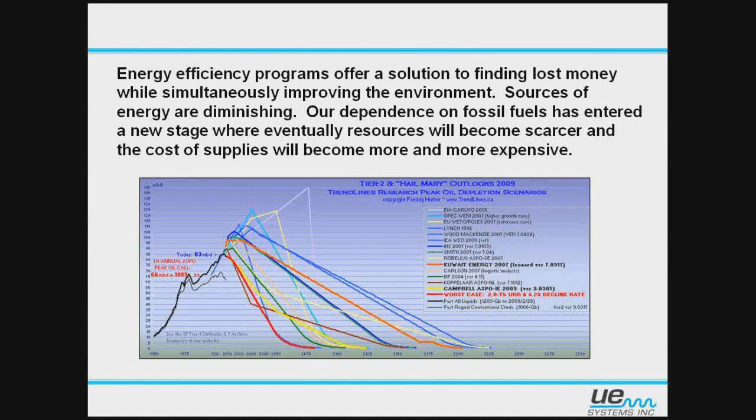Fossil fuels are depleting, and we are trying to find new energy efficiency. And because of our dependence on fossil fuels and the lack of them, prices are higher as they are becoming harder to find. I think we all realize that. And really going back to the pump, it's really affecting us all. To reduce the impact of fossil fuels, companies are aggressively finding and implementing new programs to reduce the usage of energy. Some of the programs require a lot of money to initiate. It may take years to complete them.

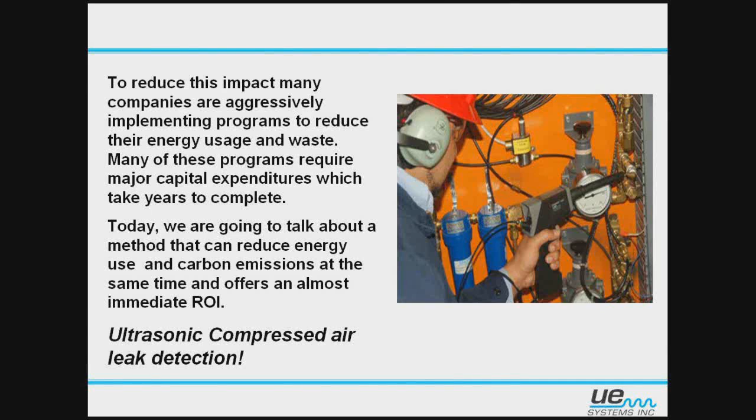But today, we are going to talk about ultrasonic compressed air leak detection. And with that, we're going to talk about the method that can reduce energy use and carbon emissions at the same time and offer an almost immediate return on investment. And again, that's going to be leak detection. So let's get going on that.

But let's say we even double that usable energy to 36% efficiency. Is that a good standard? I don't really think it is. So really, what we're doing is we have an inefficient machine feeding leaks, making it more inefficient. So we want to get the very most efficiency out of that machine that we can because it's already inefficient.

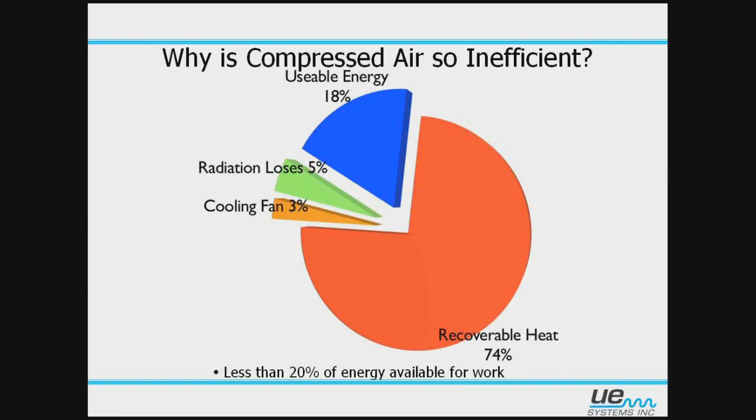And just to give you an idea, I looked up some stuff here. On average, it takes 8 horsepower of electricity to make 1 horsepower of compressed air. That's not a very good ratio. 1 horsepower of electricity on average is about 746 watts, or you can think of it as 1 horsepower of electricity will produce about 4 CFM. So a lot of electricity just to make that compressed air, right? So we really want to make that as efficient as we can.

Now, how do ultrasonic instruments work? I told you we're going to be able to detect the compressed air leaks. And let's talk about that for a second. I'll read that and then we'll talk about it. Ultrasonic instruments detect the high-frequency turbulence created by any compressed air or gas leak. It is not gas-dependent. What's happening is this.

Imagine a pipe with compressed gas in it, whether it's air or gas, it doesn't matter. And imagine that pipe springs a leak. And so you have that compressed gas escaping out into atmosphere, which will be a lower pressure. What happens at that leak source? That compressed gas wants to expand out to the lower pressure outside. As it's doing that, it forms little vortexes and eddies, or think of them as tornadoes. And right in that area, that leak site, is what we call turbulence, or turbulent air.

Turbulence emits ultrasonic sound waves. Ultrasonic sound waves are very directional, which allows us to find them very easily with the instruments. All right? So with the high-frequency sound waves, we hear them easily.

You may be thinking, how can I hear this in a noisy environment? Number one, we must think: just because it's noisy to our ears in our audible range does not mean that it's going to be noisy to our ultrasonic unit. Remember, we're going to focus in on a certain frequency. For air leaks, it's 40 kilohertz. And at 40 kilohertz, it may not be very noisy or as noisy as you thought it was.

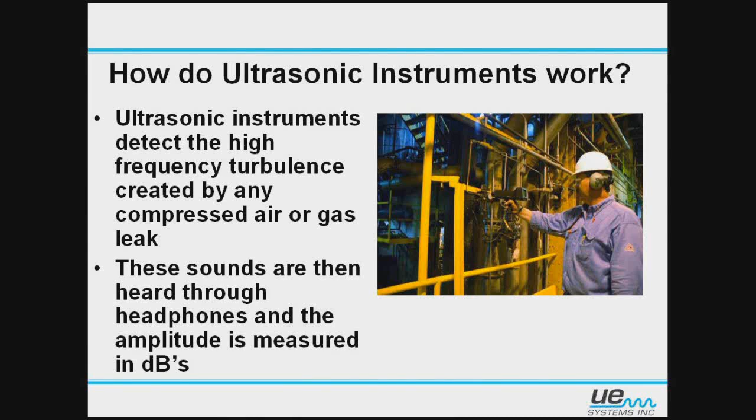But let's say that it is very noisy in the ultrasonic area. Remember, the sound is very directional, so that signal is very directional. So we can key in on one sound and follow it to the very source of it. All right? These sounds are then heard through the headphones, and the amplitude is measured in decibels, and we abbreviate that dBs.

So what I want to talk about right now is how do we locate that leak? I'm going to go through this fairly quickly, but just to give you an idea, let's look at that picture on the top left-hand corner, the #1 picture there, and that's called gross to fine. The gross to fine method is how we find air leaks. What that means basically is we're going to start out with a big area, and we're going to narrow it down till we pinpoint that leak at the very end.

So at the very beginning, we see that gentleman starting at a distance from the area that he is scanning, and he has his sensitivity turned all the way up. Think of sensitivity as how much power you are giving that unit to listen to that sound. So if we turn the sensitivity all the way up, we're hearing all kinds of stuff. Right now, he's probably hearing everything, so he can't hear it all that well, so he'll adjust the sensitivity down until he finds a directional sound wave.

Once he finds that sound wave, he's going to adjust it down to just where he can hear it. It doesn't need to be loud. Loud is not always good. He keys in on it, and he's going to start walking toward that sound. He should have adjusted it down to the point that he hears it when he's focused straight on, and when he flicks his wrist to the left or to the right, he barely hears it in either direction, or doesn't hear it at all. But when he comes back to the center, he should hear it nice and clear. And then he'll start walking toward it.

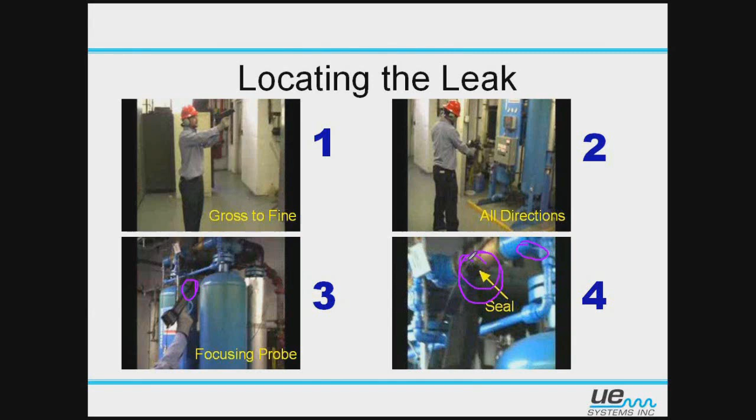If he still hears it and it's nice and crisp and loud, he knows he has that leak. If, say, he's sealing up over here somewhere where the leak is not present, he will not hear that leak. But here, he'll hear that leak nice and loud and clear. So sealing up on the leak site is the way we confirm that there is a leak there. Okay, so I know that was quick. We will continue on here to the next slide.

All right, once he's sealed up on that rubber boot or on that leak site with the rubber, he's going to store the decibel. But before he stores the decibel, once he's up here in this area, he's going to back off 12 to 15 inches from where he's sealed up and where he located that leak and where he confirmed where it was. He's going to back up 12 to 15 inches, or 30 to 38 centimeters there, and then he will store the reading. So remember, confirm where the leak is, then from that leak site, back off 12 to 15 inches directly, and then store the information.

And once we store it, it's going to store the information as a decibel right there. Excuse my drawing. But we're going to measure the leak in dBs, or decibels. That decibel is going to give us a whole lot of information. Also note that he is at 40 kilohertz. All right, and that is the place to be for air leaks.

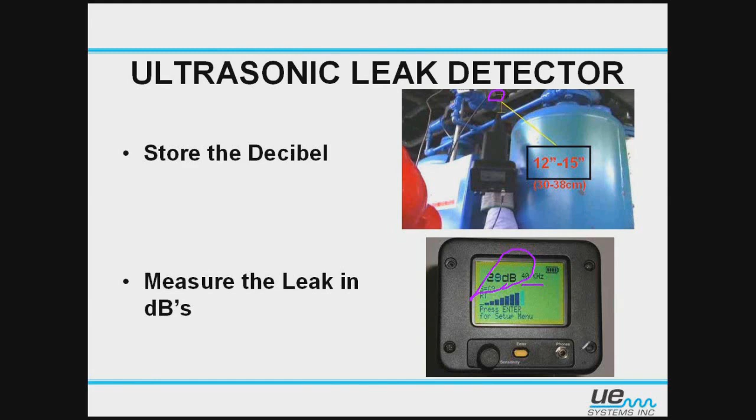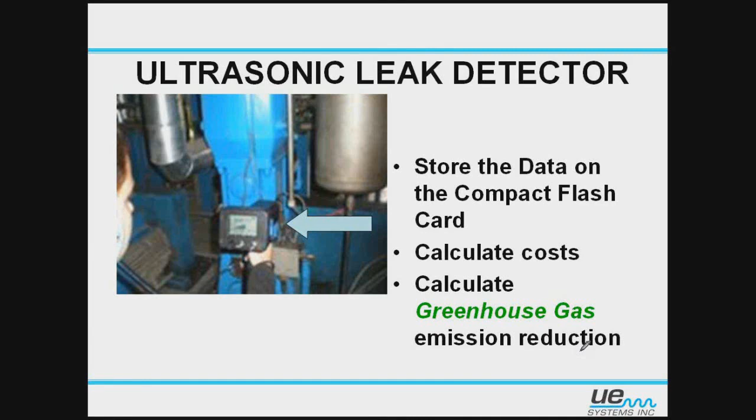Now when you store the information, you're either going to store it, if you're using the 10,000, on a compact flash card, or if you're using the UltraProbe 3000 or 9000, on the onboard memory. And then you're going to connect up to the computer and download the information, whether it's on the flash card and you have a flash card reader, or you connect directly to the gun with the 3 or the 9000. And once we do that, we're going to be able to calculate cost, calculate greenhouse gas emissions, and how we're avoiding that as well. Okay? And so the software is going to give us a whole lot of information.

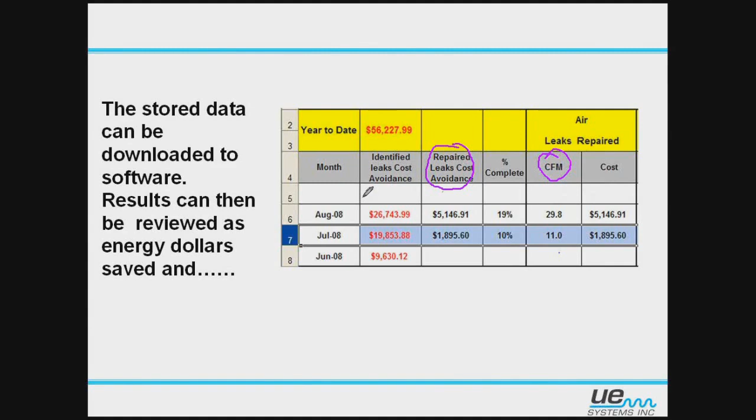If we move over here to the repaired leak cost avoidance, once we repair it and document that, it's telling us how much we've avoided in an electrical cost. It also gives us a percentage of what we've completed as well. Also, it gives us our CFM. What are we leaking in CFM, cubic feet per minute, and it'll give us a tally of overall as well. But we can convert that CFM into kilowatt hours, and once we do that, we can get a cost, and we have our cost here. So it's doing it automatically for you by you just putting the decibel and the correct pressure in there that you were scanning for. So we will move forward.

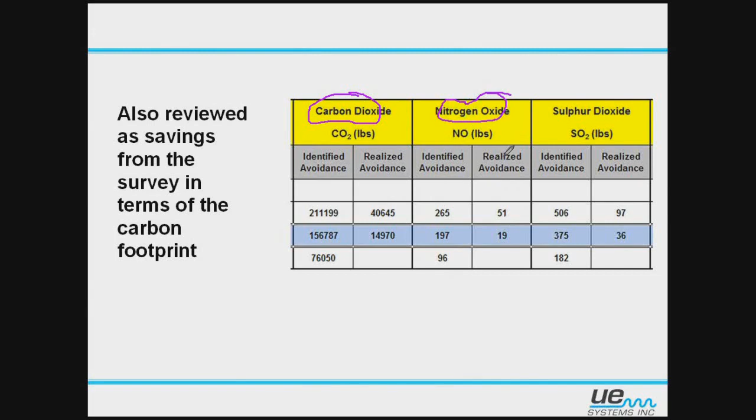The big thing that the software also does for you, as we've been talking about the carbon footprint or the carbon dioxide avoidance, is this allows us to see what we're avoiding in that carbon footprint by not using that electricity that we were using. It shows us carbon dioxide in pounds here, the identified and the realized, meaning the completed repairs, what we've avoided, the nitrogen oxide here, the identified, and then the completed as well, and then sulfur dioxide.

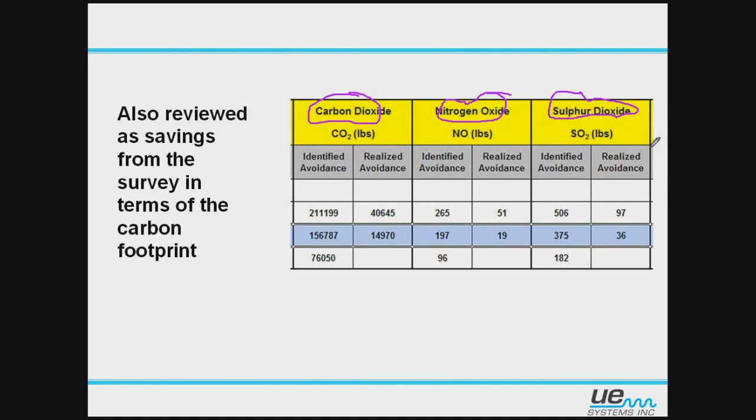So it's given us an idea of what we're actually avoiding. It's giving us a number, a figure, which really helps other than just plugging the leak, which of course is the most important part. We're going to correct these leaks once we have identified them, but it's letting us know, hey, here's what we were leaking, here's what it was costing us, here's what we were putting out into the atmosphere, now look at what we're not putting out into the atmosphere, look at the money we're saving.

Okay? So now, let's see how we convert all the data collected from the compressed air survey into usable, reportable data. So what we're going to do is back out of the PowerPoint presentation right now, and we're going to look at the software itself. So we'll start with UltraTrend DMS.

So I'll give that time. I know it takes a little bit of time for y'all to catch up from my screen, so I'll make sure that it's up there. Hopefully everybody is seeing UltraTrend DMS version 3. And now I have a plant opened. Well, I don't have it opened. I have it highlighted there.

And that Maple Street plant comes in every version of DMS that we give to you as an example plant. So you can follow along with yours. You can go back and do what I just did to the T, because this is the same plant that you should have in your software. So Maple Street's the name of the plant. And of course, for DMS, I'm not going to go through all of DMS right now. We have webinars previously done that will walk you through, just like I'm doing, through the DMS, how to upload, how to download, and everything else.

Do remember, though, when we are uploading and downloading to DMS, it's very important to go to Communications and know what you're doing. Remember, send group to flashcard, download from flashcard is for the 10,000 only. Upload group and download group is for the 3000 and the 9000. More than likely, for the 3 or the 9000, you'll probably have to configure that port because you are on a cable. And once you configure it, you test it, and it's either going to say unsuccessful or successful. If you're successful, go on with your upload and download.

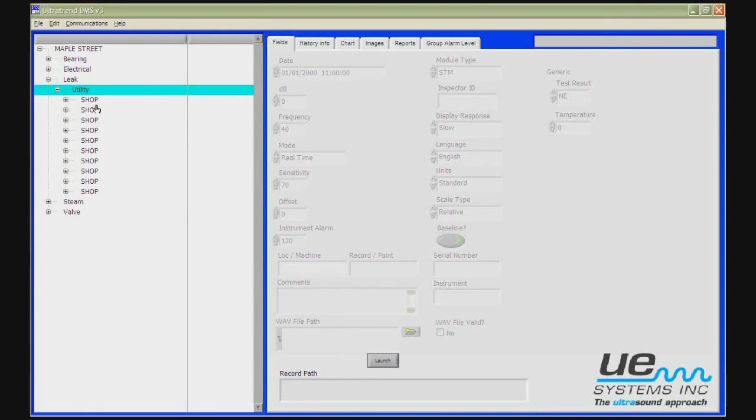So the way this one was particularly done was they built it down to utility. They're going to go survey the shop. Once they surveyed it, they added all this in when they downloaded the information. This was blank, but when they came back and downloaded it, it populated it for them. So the shop area, they used tags for each one of these that they located. Each one of these numbers is an identified leak.

The tag number for this first one here is 12334. Notice it has a 001 after it, and if you go below that, notice it has a 002 after it, and then so on and so forth all the way down. The computer will automatically generate these numbers here, the 001, the 002, and 003. Don't be concerned with those. Those are your point numbers, or your location where you exactly found that leak.

The way you're going to keep up with it is either by description or by the tag number, a 2- or 3-part tag that you can get from us or wherever. But you want to tag it. How is anyone going to come behind you and literally know where that leak was to repair it? 12334 was that tag number.

And let's open up that tag, or that find, and we keep up with the readings by time and date. So we have 7/9/2008 was when it was found at 2:02 p.m. Notice when I highlighted that reading there, it activated the field view over here.

Okay, so let's walk through real quick and talk about this. Number one, we have the time and the date here, done in military time, and the date is month, day, year. The most important thing we're collecting while we're out there is the decibel. Now we need the time and date too to make a good report, and we want to see the frequency to know we were at 40 kilohertz, and that's reporting all that information back to me.

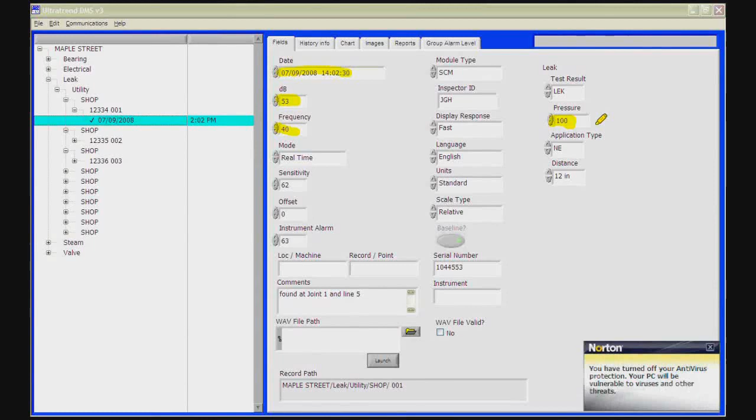The other thing that is so important to make sure you gather information on is, of course, where was the leak, but what was the pressure? Do you know what the pressure was at that point? Are you running on a 100 psi system, but you're all the way across the plant? Do you think it's really 100 psi, or should you estimate it down maybe a little lower to 75 psi? Is there some kind of gauge on the other end where you actually know what that pressure is? So don't assume, just because the compressor says it's putting out 100 psi, by the other end of it, it's probably not getting 100 psi. So you might want to check that any way you can.

But again, these are the big important things, dB and pressure. Those two things are going to give me a CFM, and we need that CFM dramatically. And then again, we double check our frequency for 40 kilohertz, and of course it'll populate the date for us.

The rest of it, we don't really need that information other than maybe down here at comments. Comments, we could type in here - notice I wrote in found at joint 1 and line 5. This will export this information as well. Okay, so with that, let's look at the next one.

Let me go back over here and change out that highlighter just so you get the idea. If we look at this one, we'll open up that reading, and we see 40 decibels here at 150 psi. Do you see that? So all the information can be changed in here. You could change that to 100 psi if it was 100 psi or whatever the pressure was, or just leave it where it defaults and then export it, and then change it in the compressed air software.

So let's say we're done here. Let's say we've downloaded this information. We've come in here to check, and we've made sure every one of these has the correct readings for us, the decibel. Maybe we've added some comments as a description of where the leak is located, and we made sure where the pressure is.

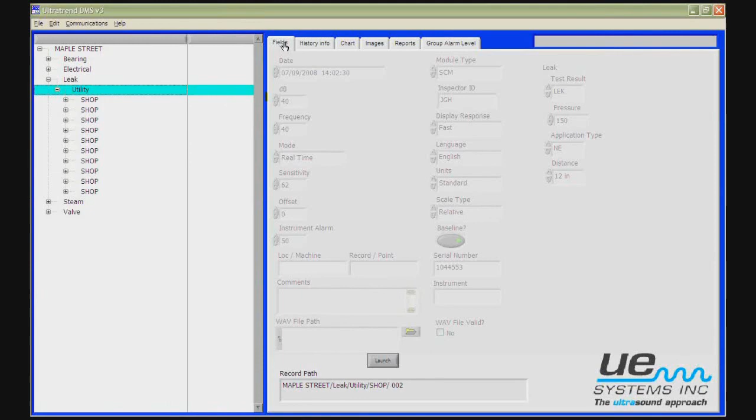But let's go through here, and I'll show you what we've done different and made a little easier. So I've highlighted - notice you've got to highlight the name of that group, the name of that route. We call it a group to be able to export. Once I do that, notice there are tabs here at the top. We were in the Field tab. We're going to skip the history info, the chart, and the images, and go straight to the Report tab. So I'm going to click on the Reports tab. Once I'm in the Reports tab, I have two options: View Group in Excel on the bottom, Launch Export Wizard on the top. Forget the View Group in Excel. Remember Launch Export Wizard, because it's going to walk us through exactly what we want to do.

So I'm going to launch that now. So here it just tells us what it's getting ready to do. You can read through that when you do it. Just go ahead and hit Next, and it's going to give me my options. We have 4 options in here for you. We have Simple Mode, we have Advanced Mode, we have Quick Mode, and those are for exporting stuff like a bearing group or route and stuff like that.

What we want to do is the compressed gas spreadsheet, and that's right here. That's what we're going to choose, the compressed gas spreadsheet. And I'll get back to being able to choose that. I'm going to select that by clicking in the circle, and that gives me the green dot in the circle. Now I know I've selected that. And now once I've selected it, I'm going to hit Next.

Everything is set up for you. All you have to do is decide where do you want to put it. I have a folder waiting on my desktop just for that, if I can find it. There it is, Air Survey. And I'm going to export that straight in there. And that's all you have to do. You don't have to do anything else. You don't have to tell it what to export. It's all set up for you.

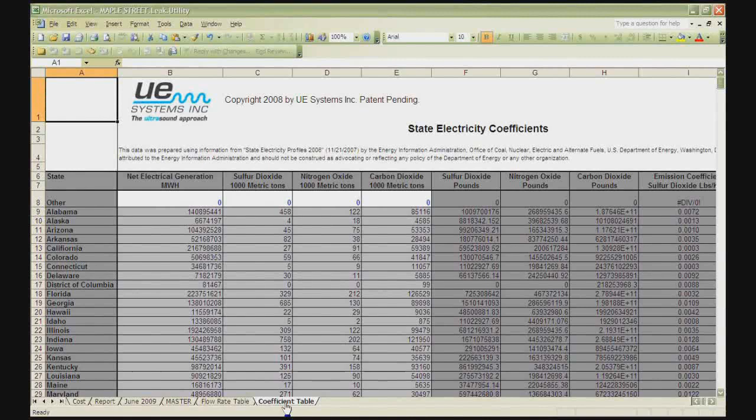And if we come to the last tab where it says coefficient table, these are the coefficients, the state electricity coefficients provided to us by the Department of Energy. You can find this out on the web, or maybe you have a better number than we have. Maybe you are in these states, but you have a better number for your area of that state, and you know better what these numbers are.

Or maybe you're in Canada, or maybe you're somewhere in Europe, and you need to know better, or you need to go find out. You'll put them in under 'other,' and you'll just put those numbers in there, and that way, that will give us our carbon avoidance for the compressed air software. That's where we're getting these numbers from. If you have any questions, contact us, but that's all that is.

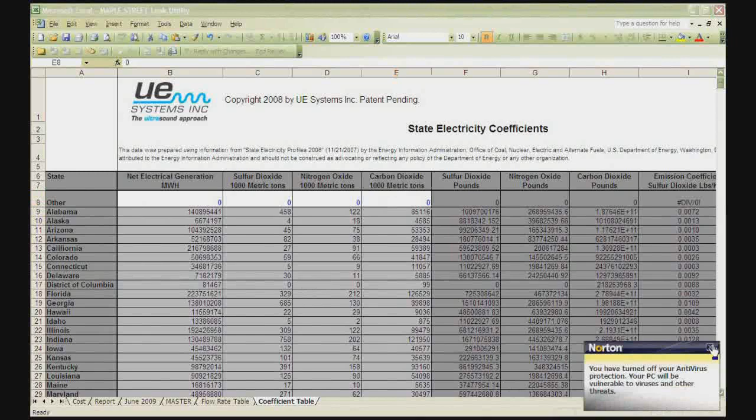So it's important, if you're going to use that avoidance, to choose the right state or to put the right information you have in here. So let's go back to cost. Let's make sure we got everything. We've got New York, year 2009, 15 cents per kilowatt hour, hours per day 24, 365.

Great, so now we'll go back to our report of June 2009. We'll look at everything in here and make sure everything's correct. This is the record numbers. The utility is the name of the area or the name of the route that we had made the group. It was in the shop area with the identifier tags. We're looking up air, air, air, and air.

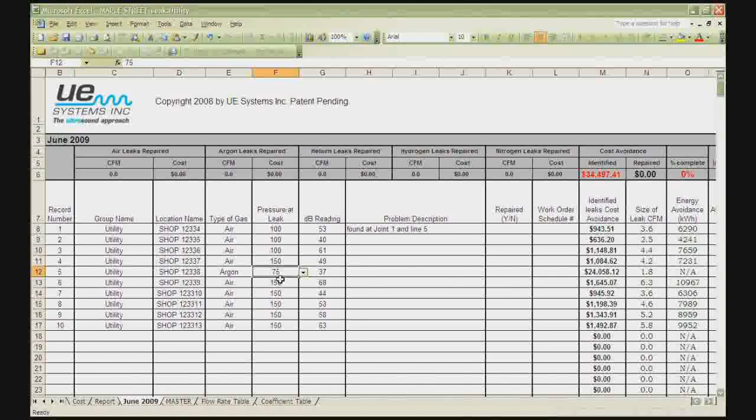So if I wanted to change one, let's say we want to change this one to argon, and let's say it's actually emitting at 75 psi there, because that was an argon leak, not an air leak. And here are our decibel readings here. So we have pressure here. Make sure you're getting that correct pressure. Always round down to the lower pressure. The decibel reading will be the exact decibel reading that you collected. And then any descriptions you want to write in. I wrote in found at joint 1, line 5.

We could write in this one found at, I don't know, joint 3 on line 2. And so just where is it? And then the next column over, what we want to look at here is CFM column. That's not the actual CFM. What we want to look at is the repaired under CFM there.

And it says Y or N. That means yes or no. Has it been repaired? Right now, if it's not repaired, leave it blank. Don't put N in there. Just leave it blank. If it is repaired, put a Y, because that's going to change things for us. Note over here it says repaired $0. So we'll click out of that box. It automatically starts tallying how much we've repaired immediately. And that's just on this one report here.

So let's scroll on over here to look at the end of the report. All right, so we have the repaired, yes or no. Work order schedule number. Did you get a work order for this? Who's going to repair it? That's a big part of this. This has to be repaired. Did you repair it while you were out there? Did you carry some common-sized tools with you that you could quickly repair some of these leaks? Or did you have to form a work order to get it repaired?

Next column is our cost avoidance column. Notice we've identified $34,497 worth of leaks. Now, I did throw in that big argon leak, but still at the same time, we are leaking a lot out of those 10 leaks, $34,497. That's what we've identified, and only 2 have been repaired. So $1,579 has been repaired. The size of each leak, 3.6 CFM, 2.5 CFM, so on and so forth, all the way down. And then in percentage, how many have been completed? So 5% of what we found has been repaired.

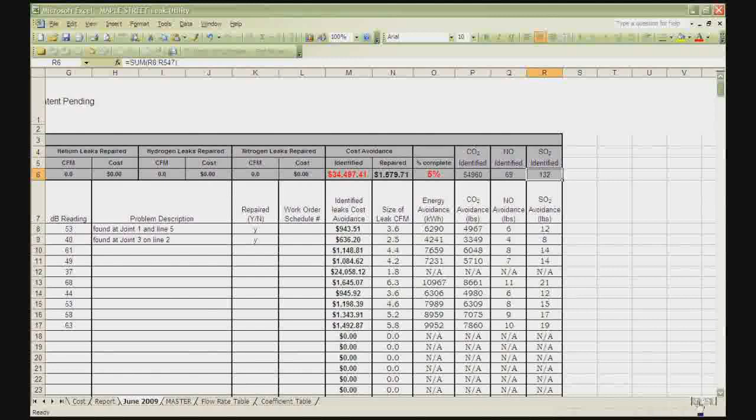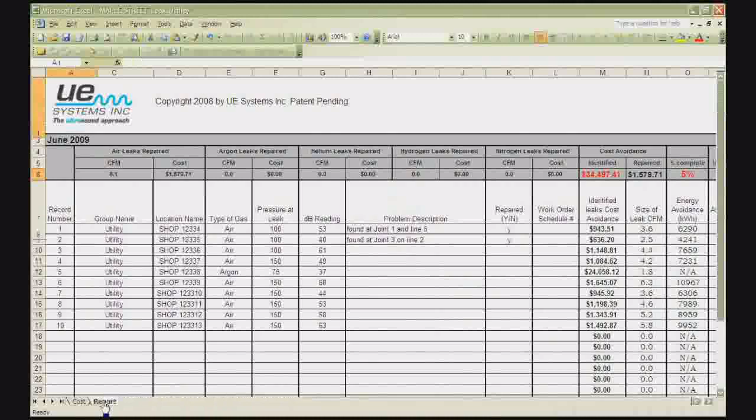$34,497 here, repaired leaks. It's just tallying everything, and then it will list each separate survey as you keep adding to this. So that's why I made a folder so I could always keep that Excel spreadsheet in there. I'm going to keep exporting to that same file, and it's going to ask me, do I want to replace it? And I'm going to say, yes, I do want to replace it, because it's going to give me the old and the new when I replace it. If I say don't replace it, it's just going to add in a separate Excel spreadsheet, and that's not what we want. We want to keep adding to this one Excel spreadsheet to keep that running tally.

All of this is printable and reportable, of course, and it is in Excel, so you can do whatever you want to with it after you've exported it out of here. But we're literally giving you the year-to-date, the exact CFM you're leaking, and that's all converting it to money. So it's really simple, it's really easy to do, and you see if you scroll across, it gives us all the information tallied up for us. And then, of course, you can add notes on the bottom.

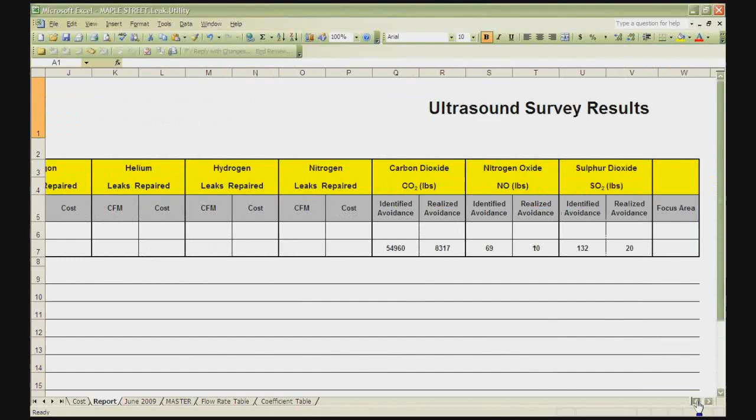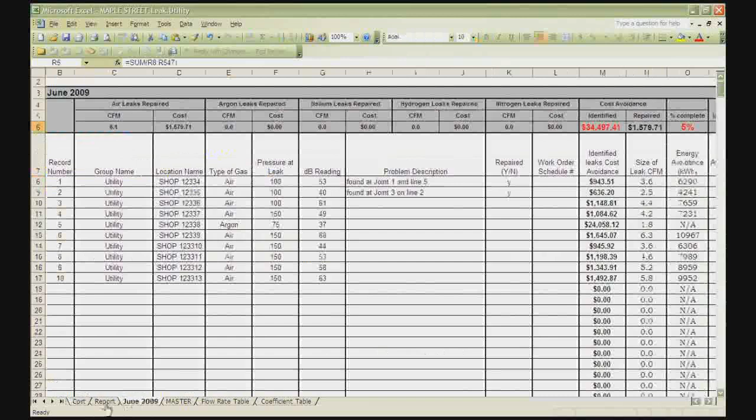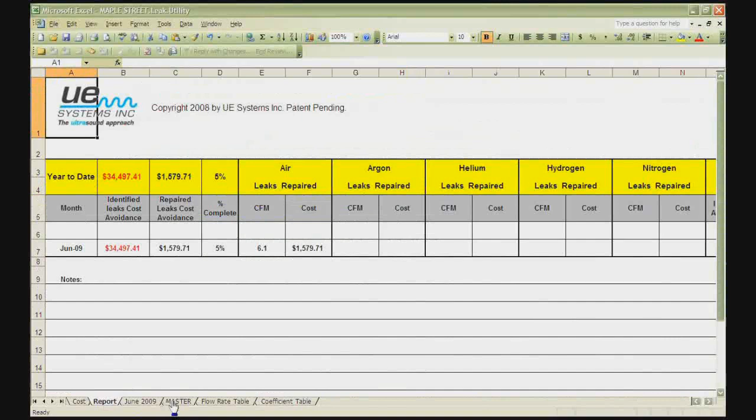Now, if you look at the tabs on the bottom, the big ones we're working with here: cost, the actual report itself, June 2009 there, report for the overall picture, and to make sure that we have the right coefficients to get that greenhouse gas avoidance. Okay? We do give you a blank master copy if you want to go to File, Save As, and save it as something different.

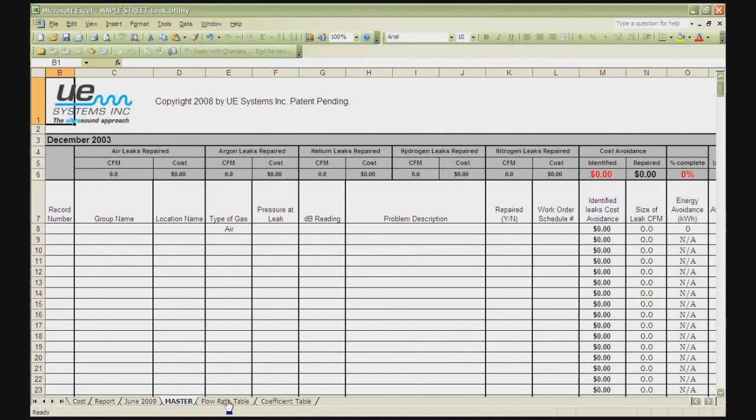You do have a blank copy that you can manually input information into. And then, of course, a flow rate table if you're using some of the analog instruments or whatever, you can look through here. But again, with the new way we're doing it, all you need to find out is the pressure and the kilowatt hour. Everything else is industry standards as far as brake horsepower and everything like that for the equations to get this information. Okay?

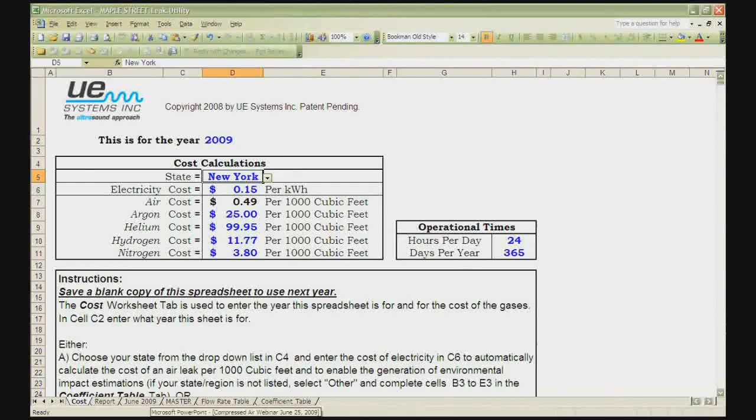All right, so I believe I've covered that all. Let me think real quick here. I don't want to leave you hanging. Just take a look at it. If you have any questions, be sure to call us. We love to talk about this stuff. Yeah, I think that covers it. So we'll get back to the PowerPoint presentation and finish that up. So we saw all that.

It works really easy. Remember, in a wrap-up of that, we're going to go out, collect the information on our digital instruments. We're going to come back. We're going to download it to the DMS. It's going to populate the information. We're going to export that information into the compressed air survey. We're going to correct our kilowatt hour, our hours of operation, our coefficients, choose the right state or the right numbers if you're not in the states. And then the rest of it does it itself, as long as you've chosen the right pressure

and you've taken a good decibel reading. And remember, it's so important to back up 12 to 15 inches before you take that reading. I know it's nice and easy to look at that reading right when you've got that boot sealed up on it and it says 95 decibels, and you back off and it says something like 70 decibels. The better reading is 70 decibels. Don't try to overdo it. It should be backed off 12 to 15 inches.

And remember, when you're looking for these air leaks, I see it every time I go train somebody. The guy takes the gun out. We've all done it. Starts scanning, and he never touches that sensitivity dial, and he wants to give up almost immediately because he can't center in on the sounds. Don't think about where the air leak is. Let the sound lead you to where the leak site is, and we do that by adjusting the sensitivity using the gross to fine method and then putting the rubber boot up on it and confirming the leak with that rubber boot. Okay? So that wraps that part up.